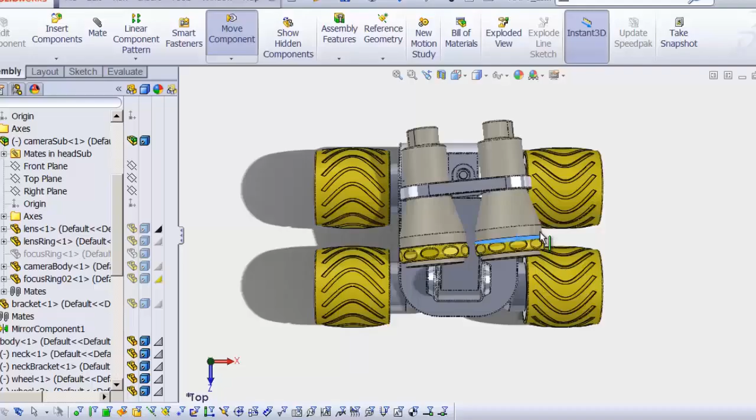Now believe it or not, most of our work here is done. The rest of this is pretty straightforward, so I'm not going to walk through it step by step. I'm just going to show you the concepts, and then I want you to use this as an opportunity to practice getting around SolidWorks. So let's head back. I'm going to click my Window menu and go to my finished scissor demo assembly. And by the way, I'm going to upload this assembly so you can open it, see how it works, look over here on the left and use it however you need to as a visual reference while you're putting together your own copy of this.

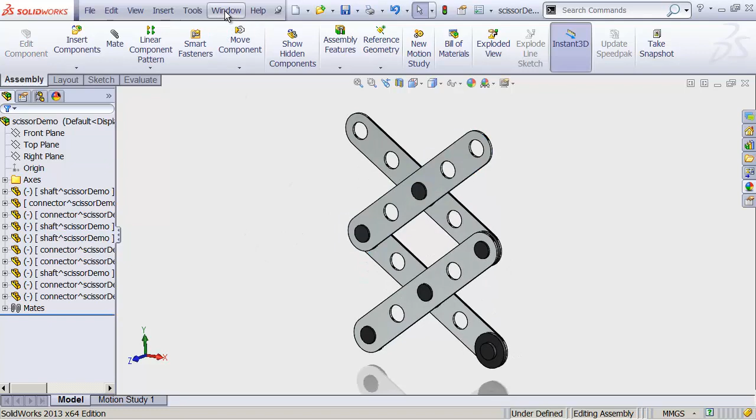But essentially, we're just going to create a bunch of duplicates of these parts and then combine them together into a working mechanical assembly. That's actually really straightforward to do. So let's go back to our model. And to put this together, first of all, we need to make sure that something is fixed in place and can't be moved. That's really important. So this connector is going to serve that purpose. Let's right-click our connector and say Fix.

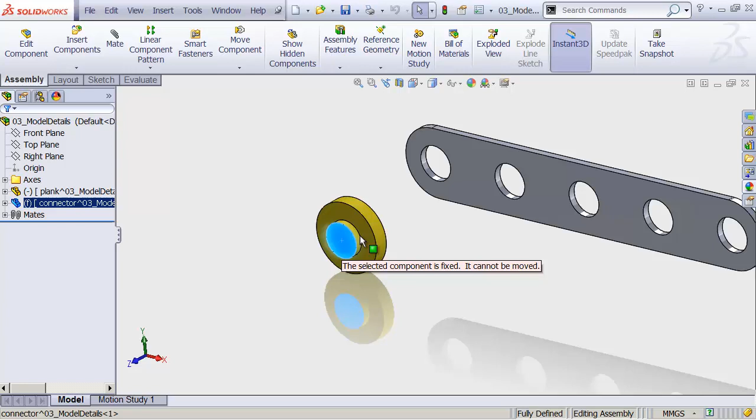That's going to put a little F to the left of its name, and if I drag it, it's going to say the selected component is fixed, it cannot be moved. That means we can't move it, which is really good. Otherwise, everything's just floating out in zero gravity space, and it gets really hard to control things. It's good to have something that's locked down. Okay, so let's take this and move it around. We can show that it floats perfectly.

So to put these together, let's hit the S key on the keyboard again. We'll head over to this paperclip icon called Mate, and you'll see that it says that it positions two components relative to one another. Pretty straightforward. It's exactly what we want to do. And then we're going to mate these things. And notice over on the left, as always, we have our Mate tool properties to pay attention to.

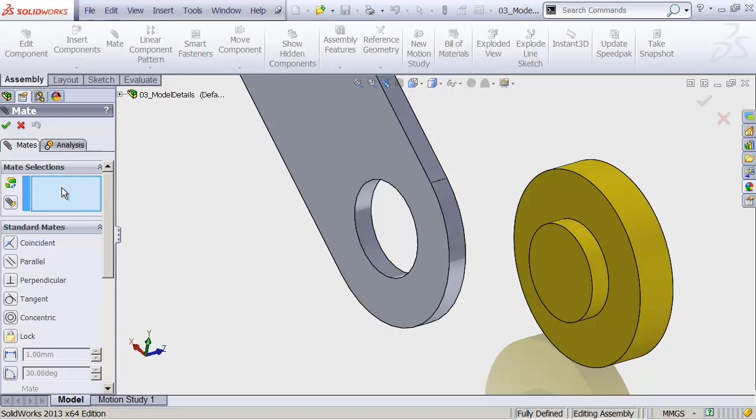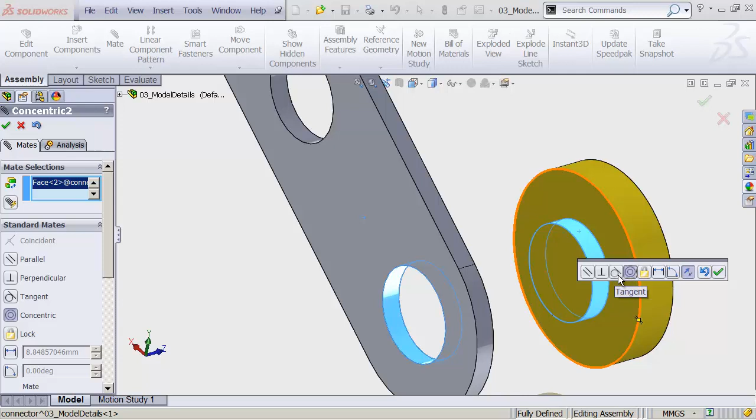I'm going to click in the Mate Selections area, click on the inside face of my plank, and on the outside face of this shaft here. And that's going to mate those together, and SolidWorks has inferred that those are both circles, and therefore we probably want them to be concentric. But if we wanted them to be tangent or something, that would be fine too. We could click that. But let's just click OK. And it automatically fires off the Mate tool again. And this is really nice, because usually you want to do multiple mates at the same time.

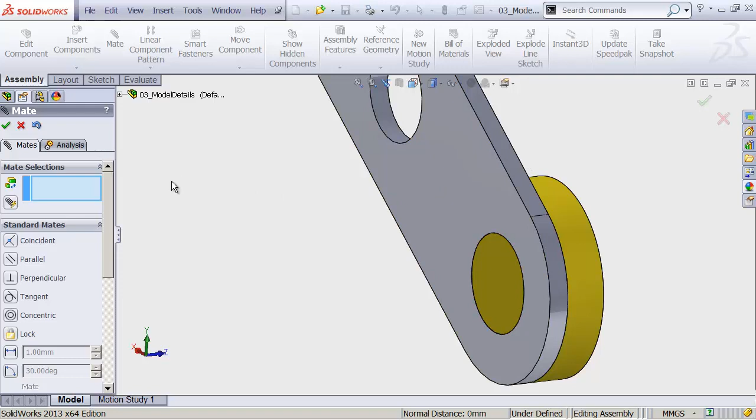So we've done one. Now let's click on this face to select that one. Rotate around, click this face, and it's going to put those together. And once again, when you choose two planar faces, it's going to assume that you want to make those coincident, which is a fancy word for touching, right? Click OK. And our tool is still running, but we're done mating. So let's click the green check mark to exit that tool. And I'm just going to go to my isometric view to zoom out. Now I can click and drag this, and you'll see that it rotates exactly the way that it should. Really, really nice. Perfect.

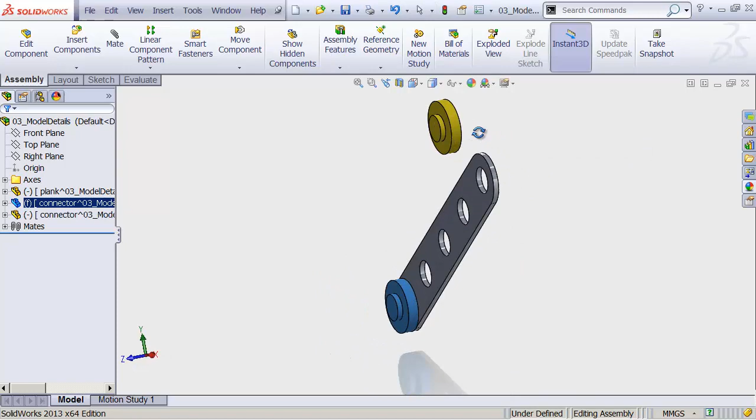Now to add more pieces to this, all we have to do is duplicate these original parts. So let's contract this over in our Feature Manager design tree. Select the connector, Control-C to copy. I'm going to move my mouse out here in the viewport somewhere, and Control-V to paste. And notice that it pastes it right where my mouse was, which is kind of nice. Now to mate this, we're going to do the same exact thing again. Let's go to my paperclip icon. Click this face, and then click OK. And then this face will go to this face, and hit OK. And we can exit our Mate tool, and now these things are all mated together. Once again, we'll go back to our isometric view, and we can move these exactly the way you would think.

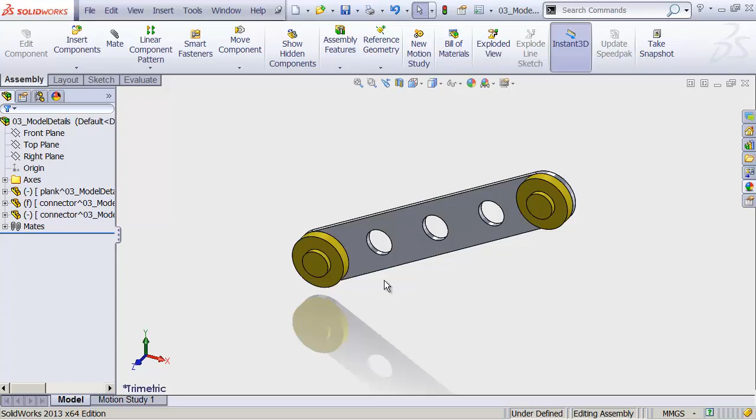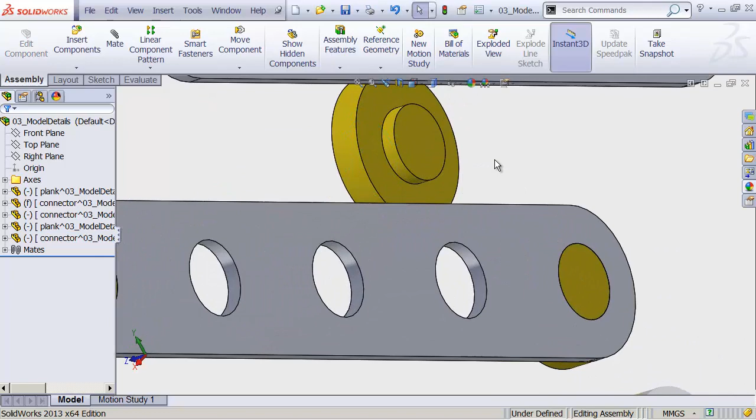Now all we have to do is keep copying and pasting components until we end up with what we want. So I'll take my plank, copy that, Control-C, move my mouse out here, Control-V to paste it out in space. We'll also take another one of these connectors, copy that, paste it, and then we'll mate all three of these together. One more time, and then I'll let you go play. Let's mate this to that, and OK. And then we'll do this face to that face, and OK. And again, we'll do this to that, and OK. And then this face to that face, and OK. And OK to exit the tool.

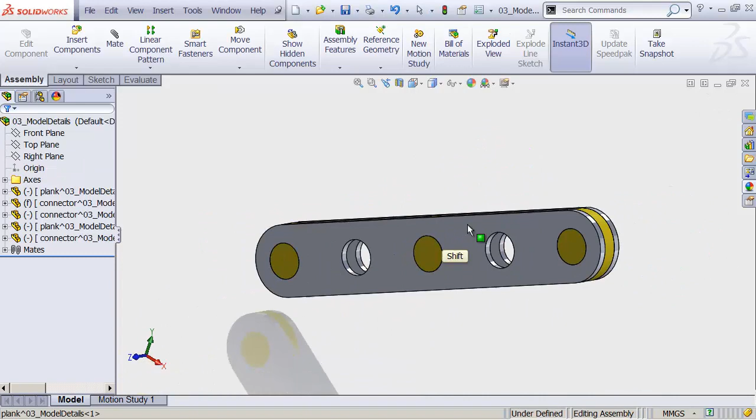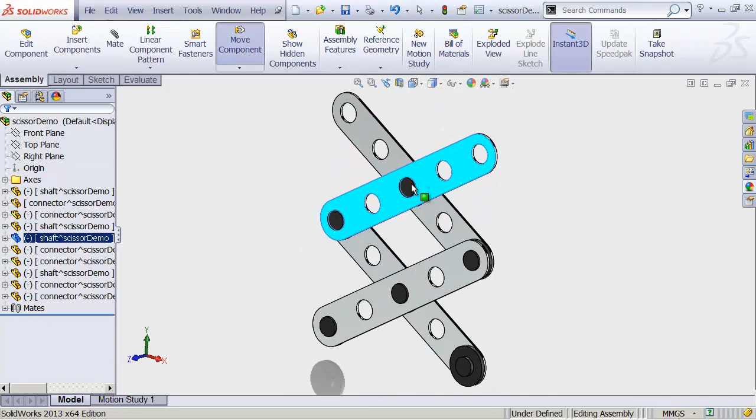Now if we drag this, these guys will move like scissor links, and we can keep adding more of that stuff until we end up with our final scissor demo. I'm not going to show you the rest of this because I want you to struggle through it. I want you to fight your way through this and make sure that you understand a few different things. One, how to model a part, how to navigate within our 3D viewport, and how to add mates between parts in our assembly. All right, go play, and when you come back, we're going to do some really fun stuff.